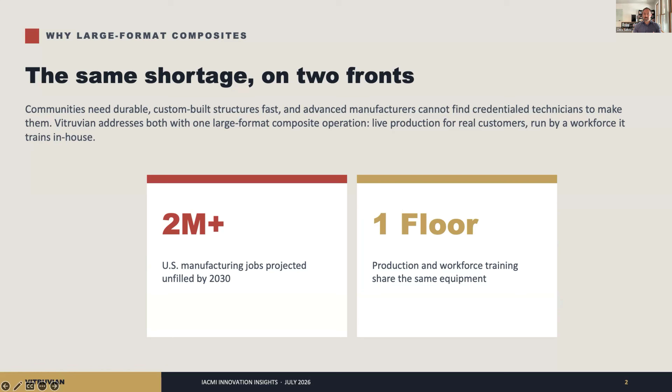Vitruvian exists to solve the housing crisis, and that was the first obstacle we came across: labor is one of the major issues. Technology is an issue, but technology is really there to address labor at the end of the day. We found that we can use technology to attract new types of labor to the labor pool, and do so in a really engaging way.

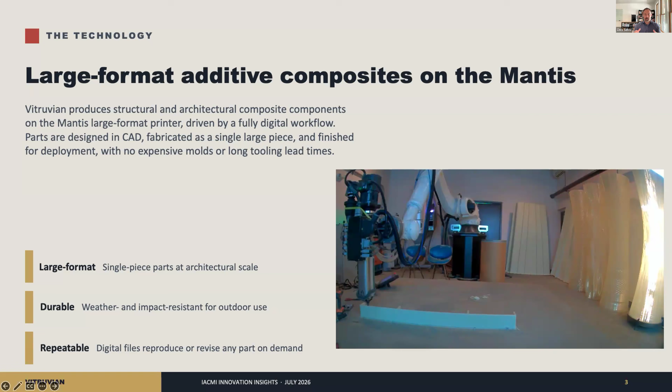Ours starts with technology. Like any tech company, we get excited about our machines. We have two large format printing systems: one composite, one cementitious. Today we're talking composite, so we're talking about the Mantis. This is built on a KUKA robotic system, large format. We can do anything from architectural components down to automotive components, and there's a lot that can be done with these flexible systems. That's what makes them exciting—we can set them up to run for weeks creating one thing, or every few hours change what that output looks like.

And it's built for the real world. We're putting out things that are not bleeding edge—these are materials and products being used today. You're going to see examples in this presentation. Everything from large format where we're doing 100+ foot installations to custom, smaller parts. But with a system like this, automotive is probably about the smallest, and maybe furniture is about the smallest thing that we're printing.

So if I ran into you in Denver, I was probably showing you pictures and video from this. This was our latest large installation. We did this for something called the Forbidden Kingdom Festival. This was 3 weeks of printing—it was quite a sprint to put in an 86-foot tall Gothic castle that rose above the main stage. If you're on the ground, this thing's 100 feet above you. And you can see in these pictures just what we did.

We're printing the columns and the parts of this. They were then painted on site, had to go through extensive testing. And the pictures at the bottom are professional photography—that's not AI. That's actually this thing being used, flames being shot up the side of it. It was one of the coolest projects we've taken part in, and it performed well—it didn't light on fire, which is great, of course.

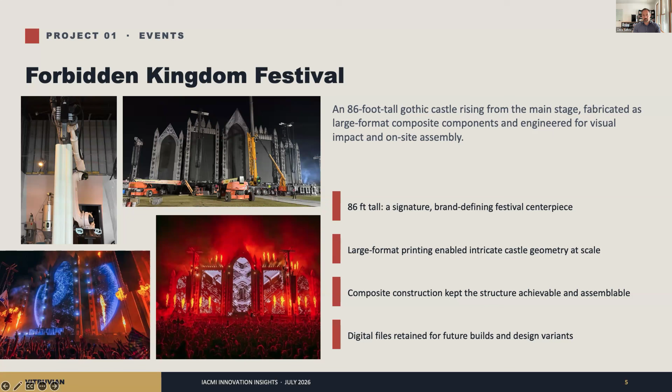It got a lot of lift on social media for this festival. They were able to sell out their 2027 tickets within 4 hours of releasing them based on the experience of this event. So to them, that's quite an economic success.

Much more grounded, we've built signage using molds, and you can build signage very traditionally as well. But one of the unique things we found with our composite systems is you can do some really amazing work and then infill it. So we like to work across different aggregates, different molds, using cementitious aggregate. This was actually coal-based, which we'll talk about a little bit. You're able to make something that's really durable and still get all the flexibility of 3D printing.

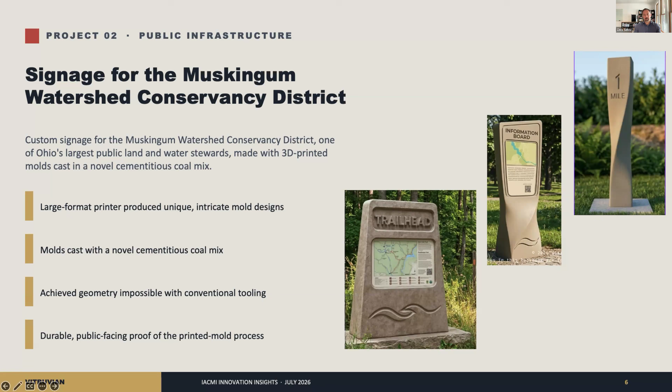So we made these beautiful molds where they feel like they're flowing with the land for this partner of ours across their large campus. They have about 18 counties in Ohio that they serve, so this is a very large trail system, a very large purview for their business. And when we got into that, we actually started dealing with coal—both for our printed aggregate as well as that infill.

Coal is an example, but one of the things I urge us as composites as an industry is to really push what we can do with aggregate. There's some really interesting areas in the aggregate life cycles and understanding what can be used that can have impacts. And regardless of what the situation is and where the incentives are to use different aggregates, I think it's up to us as an industry to really push the envelope, and it makes us more relevant—the more things we can use while building, and the different uses.

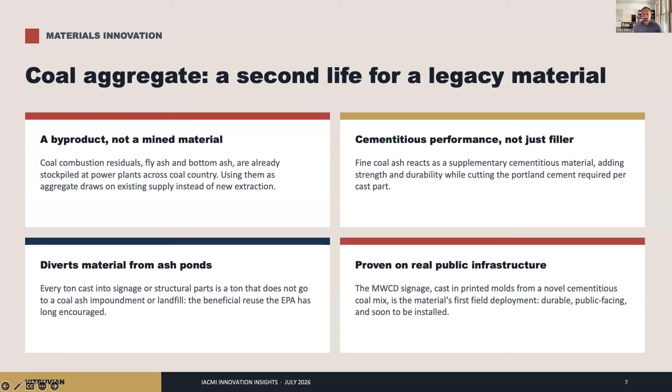We find that coal can actually add—it's not just a filler. It can enhance the strength, it can lighten our products, it can give it a new and unique aesthetic. So beyond just using coal for coal's sake, or trying to get something out of the waste stream, there are really positive upsides to using coal aggregate specifically. I think we can find those in a lot of different industrial aggregates out there that might be being overlooked, so we get really excited about that.

Now, I think at the core of our message and what we do is workforce engagement. Like I said at the beginning, we're running into an issue with this country—we're onshoring a lot of manufacturing. We want to be more active in the built environment, whether building houses, commercial structures, or just manufacturing items in the United States for a lot of reasons. But to be competitive, we have to be. And we're finding that there's a gap because the modern workforce has not really been set up to take these jobs, even though they're really strong quality jobs.

So we use these really neat, novel projects that we get access to, and we bring them to communities. And then we actually train both K through 12 and post-secondary folks, so people in the educational pathway already. We do transitional and we do incumbent workforce—folks who have jobs that want to learn new skills and increase their wage rate.

Those areas are all impacted really positively with what we're doing. We essentially use it as a labor attractant, big, neat machines with huge output and overwhelming projects. And we found that with the right type of education on top of that, we can build in industry recognized credentials and stack them in such a way that as you're learning about 3D printing, you're learning things like CAD, you're learning all these robotics and workplace safety and manufacturing that are then very translatable.

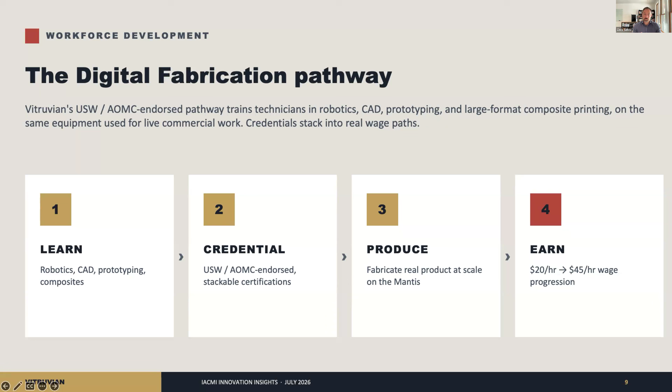And we're starting in manufacturing at $20 an hour, working up to 45 in a couple of years. And that's a really strong wage rate for a 17, 18, 19-year-old all the way through, and they'll continue earning through their lifetime. And manufacturing, as we all know, is a much safer environment than it used to be. This is a worker forward environment, and we can teach and open up new pathways for folks using these really neat projects and technologies that we have built over time.

So lessons that we've learned along the way: outdoor with composites is super interesting. We really encourage testing. Finishing is important, coating and making sure that there's weatherproofing is great. Designing to real world environment is a unique thing to do. We have a great engineering team. I will tell you that when you just put something on paper and when you test it in the real world environment, we all know those are very different things. And when we're talking about festivals with hundreds of thousands of people experiencing something in a short amount of time, or extreme weather events, it's really important to test early and often.

It's also really neat that you can do things beyond just straight building. You can mold, you can cast, and you can do so quickly and prototype very quickly. And the speed with which we can deliver using these materials and technology is wild. To get a job and within 3 weeks deliver tons, literally thousands and tens of thousands of pounds of finished goods with 24/7 printing is, I mean, this is a new thing. This used to take months just to get the parts correctly entered in a manufacturing system to put them out. So when we talk about 3D printing and additive manufacturing, you bring a flexibility that's really been unheard of to this point.

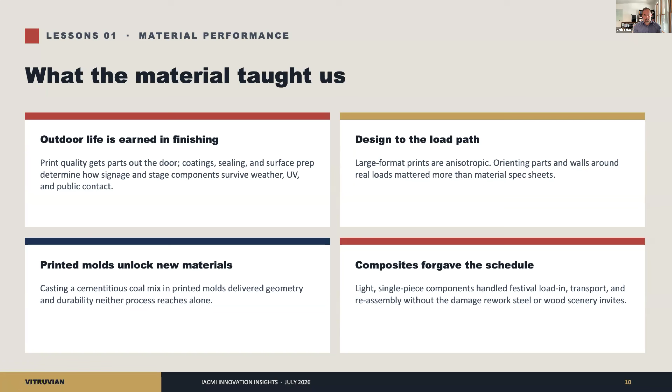And I think the workforce, the economics that drive this, we can do one-off prints and one-off projects, and we're really proud of that. So if you have a unique project that you need that is large format, we want to be speaking with you. We like making things near the install and engaging a local workforce. So wherever we do things, we actually don't want Vitruvian to be the ones delivering it. We want a local engaged workforce to do that.

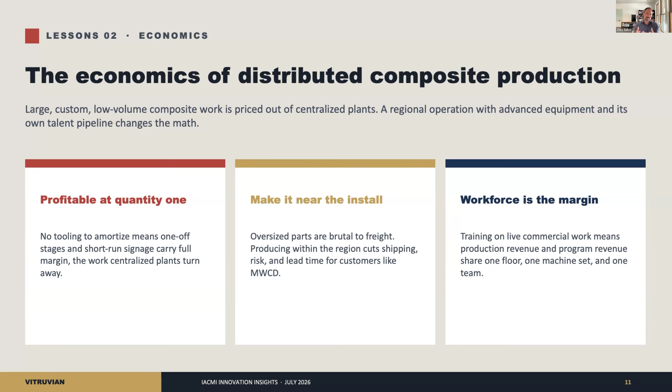And we do that all the way from our factory itself, which is in Athens. And we'll have more factories in other communities by the end of this year, like we have 3 distributed factories. But even when that print's delivered and installed, we want to educate a local workforce on how to do that. So when we work on these trail systems, we're working with a community technical center and actually educating their workforce and the kids there on how to do these installations. So this community can fend for itself. That's at the end of the day what we want to do.

And we're looking for folks that we can work with. So, I'd say that the landing message is let's build together. We're really excited. We're happy to be part of IACMI, and we're looking forward to connecting with folks, whether it's workforce programs and developing accredited learners who can get involved in the modern workforce or doing build projects. We can build it of all sizes.

We're excited. Thank you. Chris, that's really good stuff. Got a couple questions for you. It sounds like you have an incredible placement rate for people that you're training up in these different capabilities. What types of jobs are they landing when they come out and get into the workforce?

We were all over the place. Our first programs were all construction focused. So we sent people to the construction unions, we sent people to contractors, and then things like city jobs and things like that. As we get into manufacturing, we have partnerships with some of these more big mega projects in Ohio. So they're getting into more traditional manufacturing roles.

And outside of that, we've had a lot of folks who continue the STEM pathway. So high school students who now can put on their college applications that they've built a house with a 3D printer or they've done these large format things and going to engineering schools, which we're proud of, like Purdue and the University of Cincinnati and some really great programs.

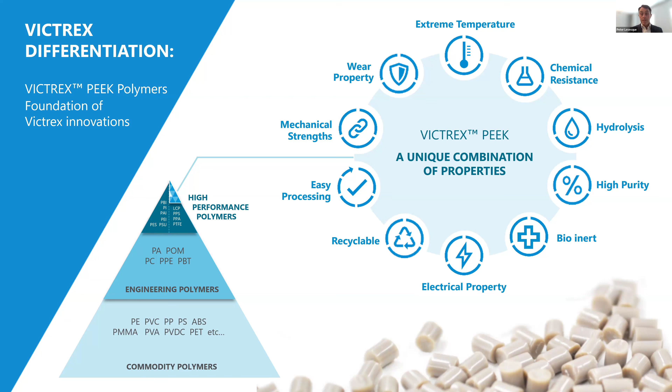As I mentioned at the beginning, Victrex makes the polymer, but we also make many forms of the polymer. After the patent on PEEK ran out, Victrex created a more easily processable polymer called low melt PAEK. Our trade name is AE250, but it's pretty widely known in the composites industry as low melt PAEK. That polymer, that powder, can be turned into a number of different forms.

One being filament, a fiber in and of itself. Another is films, and another is compounding with glass or carbon fibers. Those are all useful for making parts in their own forms or as additives to other parts. But we here at TXV primarily use the UD tape. So you can make a pre-preg tape, or others use it to make a pre-preg woven product. And then we manufacture composite parts out of that UD tape. So continuous carbon fiber with a low melt PAEK matrix.

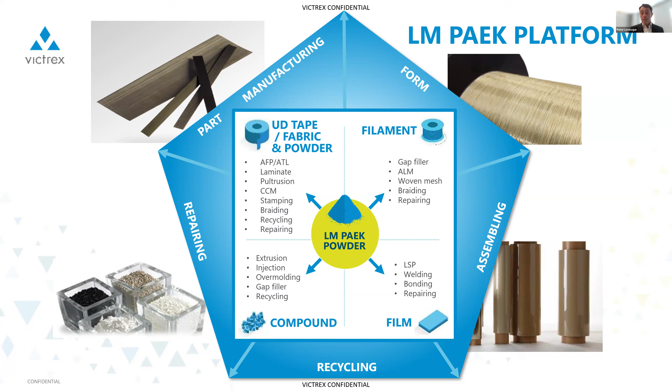All of these materials, when they're deployed in aerospace, require allowables. And as these materials are relatively new and don't have decades of history out in the market, we took it upon ourselves to generate allowables for the UD tape. So we worked with NIAR and created the basis of the pyramid here through all the coupon testing to generate lamina and laminate level allowables.

We've done that for our UD tape with an AS4 fiber from Hexcel, as well as an AS7 fiber from Hexcel. And then Toray has also done this with their T700 fiber UD tape and their T300 5-harness satin woven product. Now these coupons establish the base of the pyramid, the fundamental building block that engineers and designers will use in order to start their design. So it's the library of material properties that they will need in order to begin designing their elements, which turn into details and components and then the system.

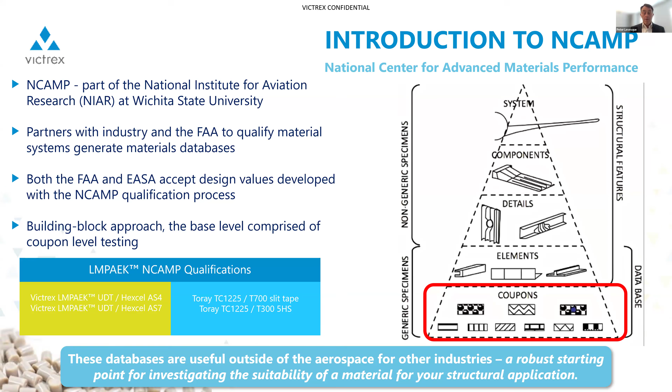We've also done quite a bit of work establishing properties of the injection molding compounds, the films, and the fibers. The polymer itself is very well documented and very well understood, from two angles. One, the performance of it, like you saw with the allowables, but also the manufacturing and processing of it. It's important, we find, to absolutely be able to predict how a part will turn out, either through mold flow and injection molding simulation software, or through stamp forming and draping software. And that covers the flow, the fiber alignment, the crystallization rates, everything that you might want to then overlay onto a finite element analysis and predict performance.

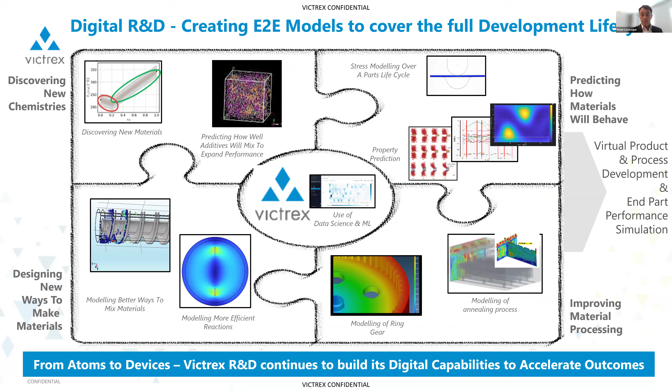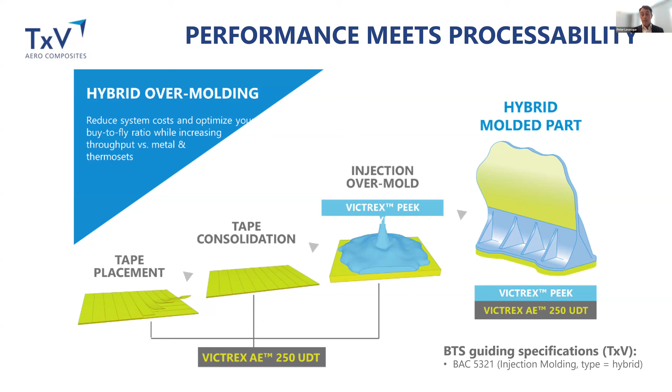So the beauty of combining PEEK and low melt PAEK is its ability to make hybrid parts. We make our composite pieces out of the low melt PAEK, and that melts at a temperature of 304 degrees Celsius. When we combine it with PEEK, we injection mold PEEK onto that laminate surface at 340 degrees C. The 36 degree difference in melt temperature remelts the surface of the laminate, and when they freeze, the two polymers freeze off together and create a welded connection. So you can have this part that has the strength and stiffness of a continuous fiber unidirectional carbon structure, but also the functionality of an injection molded component.

So we here at TXV are solving a problem that Victrex identified in the marketplace. With this low melt PAEK polymer and collection of unidirectional tapes and composites, there were a number of parts that could be manufactured either as straight composite components or as hybrids. But Victrex saw that they were playing matchmaker, finding somebody to do the design work, somebody else to do analysis and modeling, whether structural or manufacturing analysis, then maybe find a tool maker, then somebody who could do the prototyping and testing, and then somebody who could eventually transition to serial production. 9 years ago, Victrex created TXV, and we are all of those things under one roof. So we take parts from concept design early on all the way through to serial production at the end.

So we've developed this process expertise, and we've got the decades of material expertise from Victrex, and we've combined that with a collaborative engineering approach where we're really trying to understand the application and educate the customer a little bit on what the possible solutions could be with this polymer system, so that we can design and build parts that will be manufactured at rate and save money and save weight.

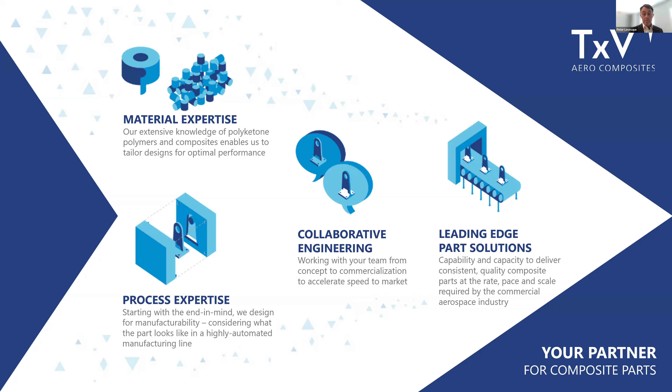So while we bring the materials and the process expertise to the equation, we don't know anything about the application. So we have to really lean on the customer to understand exactly what their part is doing. What problem does it solve? What is its original use and intent? We go through a number of questions to try to peel back the layers of this part and try to figure out exactly why it is the way it is, so that we can rebuild it in a parallel solution using these materials and this process.

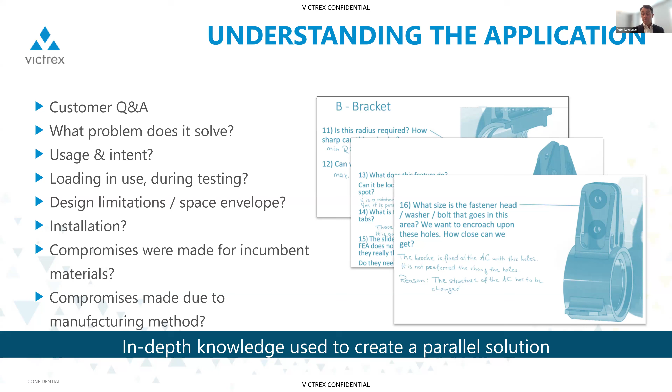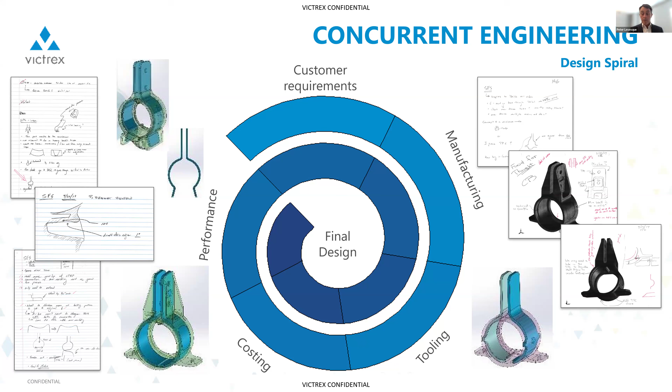It's not always linear. We end up going over certain requirements a couple of times until we get it right, because our initial understanding of the part is on the surface only, and we'll try to come up with a solution that can be made, something that we could potentially wrap a tool around, try to see if it hits the cost and performance targets, and then inevitably, when we present that to the customer, we'll get some additional feedback, and then we'll have to home in through a couple of iterations of this path down to the final design, where we're all confident that we can cut a tool and cut some steel and then eventually make some parts.

What happens though along the way is there's a number of these design enablers that exist because of the polymer and the material combinations. When we're combining the two polymers, they're close cousins to each other, so the weld connection is very good. We're combining short fibers with continuous fibers. We're combining stamp forming with injection molding, and we're potentially welding parts together as well. So there's quite a bit of opportunity to come up with the ideal part and save weight and really have a very elegant thermoplastic composite solution. But it takes a little while, and there's a whole tool set that we use to de-risk the question of cutting tools around those.

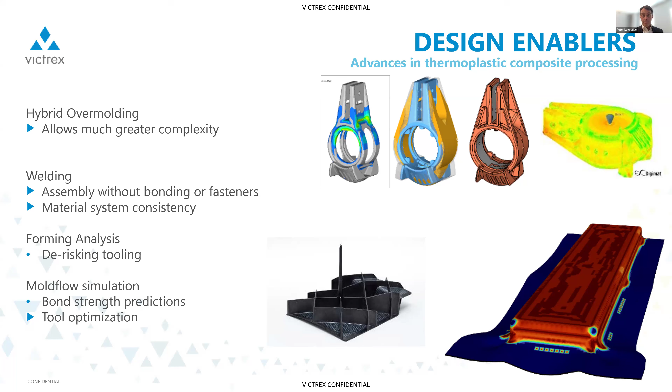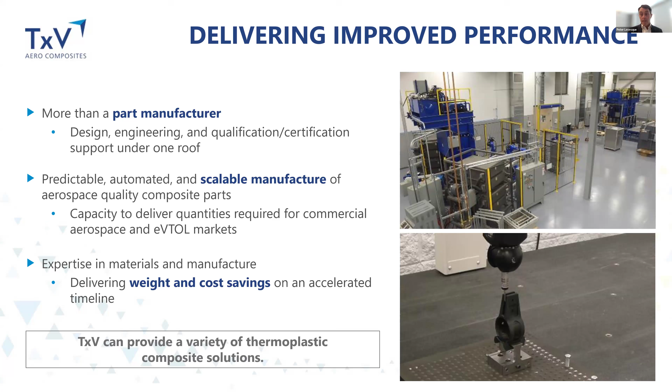Our manufacturing environment here, we're located in Bristol, Rhode Island, and we have a highly automated manufacturing environment. We have just as many engineers as we do operators, and our engineers are working with the robots and the automated systems and building out the factory so that each of these cells is really single operator run, and we can build parts at high rate. It's very scalable. Each part we're measuring the touch time in minutes or seconds, and in many cases we're building multiple parts per cycle. So it's a very efficient manufacturing process, really enabled by these high performance polymers.

We have a bit of a screening process that we like to use to figure out what's the right part. Certainly complex parts and parts that allow themselves to be combined and reduce part count is good. Part complexity is typically not something that goes along with composites, but when you add in the ability to injection mold features, you can really make some beautiful and otherwise impossible composite parts using injection molding to add those features. We also like to look at the buy to fly ratio of the existing part. Many times we're looking at a hogged out aluminum or titanium chunk of metal, and those tend to spend a lot of time in the machine creating chips. So they might buy 10 times the amount of material compared to what actually flies, whereas we'll maybe buy 1.2 times the amount of material that actually flies.

I mentioned part consolidation. When you're functionalizing a composite with injection overmolding, you have a golden opportunity to reduce part count. And then certainly mechanical performance. These are high performance materials and high performing parts. So if it's decorative or not being asked to do a difficult job, then it's probably not a good fit. And like anybody else, we like high unit volume, but we found that if you tick enough of the boxes early on, the unit volume problem actually isn't that bad. We've seen parts that make sense at single piece per ship set.

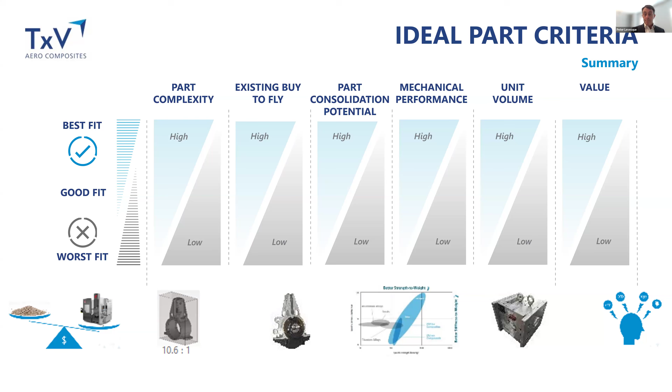A couple of examples of parts. Many of these are simply stamp formed, but these are either stamp formed shells, much like metallic stamp forming, or in a few cases we've got some hybrids. And the hybrids, we like to think of them as one of two types of parts. Either it's a shell that needs local functionalizing, local features that you want to injection mold, or it's primarily an injection molded part that requires local composite reinforcement. So think of it as the composite could be the bones inside the overmolded flesh and muscle.

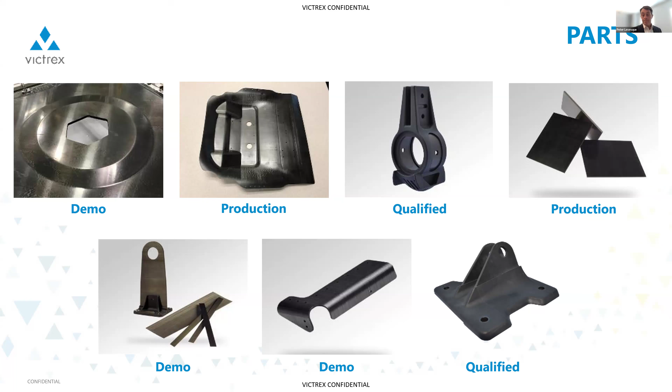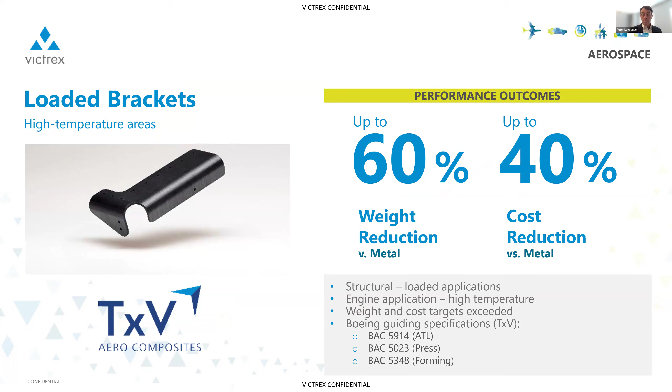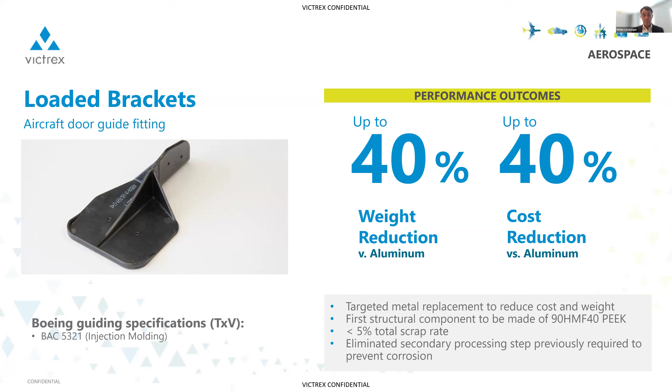Like I said, these are high performing materials, so you can reduce a lot of weight and accomplish the same job. And because they're thermoplastic based, they really lend themselves to high rate manufacturing. So you can take a lot of cost out of these parts. Again, reducing weight, reducing cost. We understand that in many cases we have to sort of buy our way onto the airplane or onto the application, and these parts typically have no problem doing that.

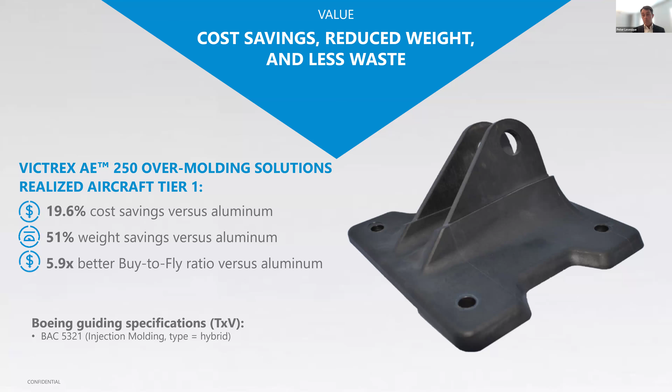More cost and weight savings. This mentions the buy to fly ratio. So in this particular part, the incumbent piece was basically buying 6 times the amount of material compared to what actually made it onto the plane. So you can see that that $3 or $4 per pound piece of aluminum now is quite a bit more expensive before you've even put it in the machine.

So with that, we can open it up to questions. Peter, I got a couple questions for you. The first one is, has PEEK been used or is it being used in high temperature environments such as ablative composites for aerospace? Ablative, I'm not so sure about. It's I guess intentionally quite high. I don't know of any myself, but I can look into it. Certainly, there's definitely people at Victrex with more history than I do, and they would know.

Question. How are the LMPAEK prepregs manufactured? In other words, are you filming them and then prepregging, or are you doing a powder fluidized bath, etc.? I would say all of the above. It just depends on the manufacturer. We have our method, which is, I think, a pretty traditional method. And I know Toray has their method, and Teijin and Barrday and Ensinger, they all do it their own way. But it can be done in basically any of those.

Great. All right, well, in the interest of time, we're going to move on, but thank you for the presentation. And let's go ahead and switch it over to Gene. Gene, if you wouldn't mind trying to share your screen and jump into your presentation. And you'll need to unmute too, Gene, so we can hear you. All right. Very good. I think I'm on. You're on. You just need to throw it into presentation mode. Okay. There. Perfect. Looks good. Very good.

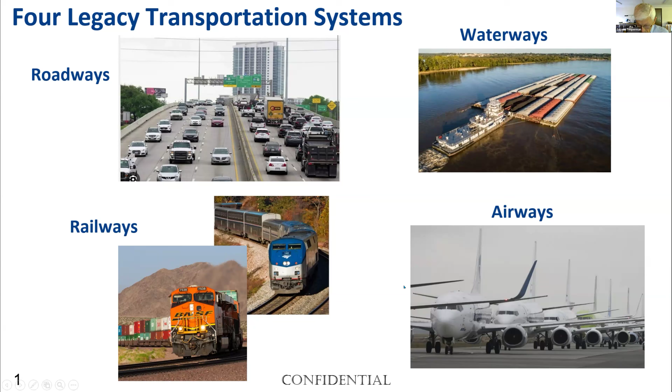We're going to talk today about transportation. And we have 4 modes of transportation: roadways, waterways, railways, and airways. In recent years, of course, demand has been increasing, and trying to keep up with those increases in demand has been very, very expensive for our country. And so adding more lanes to a highway, the congestion doesn't go away, and the improvement is marginal.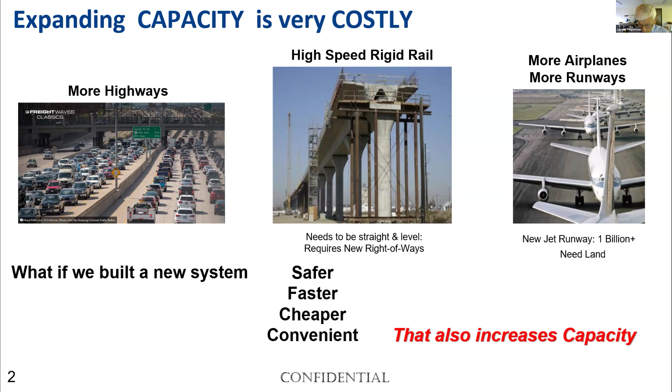High-speed rail, trying to add another rail system to the country. Well, we all know where that's going. Adding a new airport, a new jet runway costs $1 billion up, and it goes up from there. They all need a lot of land, which is not readily available. So I challenge people to say, what if we built a new system that would be safer, faster, cheaper, and convenient? And a new system, an entirely new system, would dramatically increase capacity.

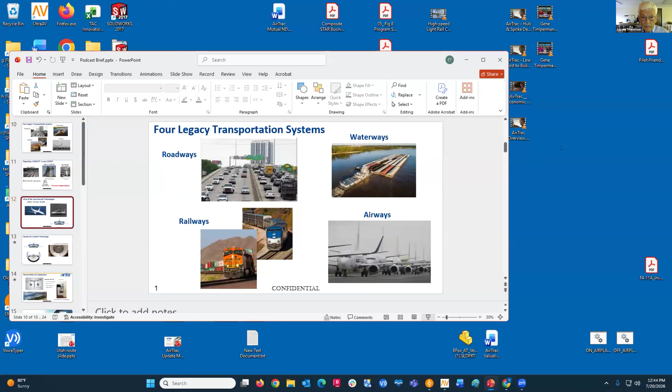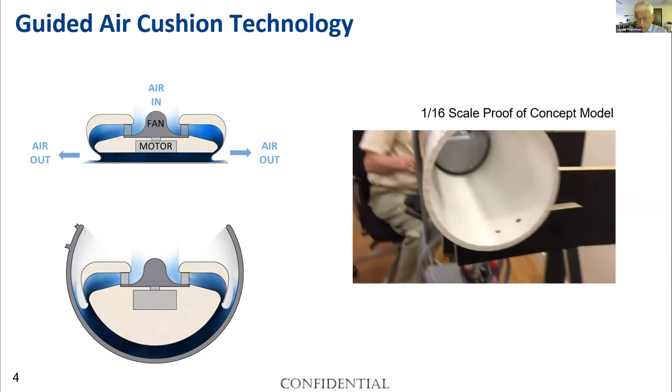Now, having a concentrically designed air cushion machine in a trough, which we now call a guideway, putting a roof over the top of it for all-weather operation, hang a vehicle underneath of it, and support that guideway on cross members and towers, we now have the elements required for a mass transit system. It is modular. You start with foundations in the ground, towers, cross members, and guideway pieces between the towers. It can be put up in pieces. It can also be taken down in pieces. A radical new idea for ground mass transit.

Also integral with the AirTrac concept is a high-speed switch, a switch rail mounted on a balance beam system that's motivated up and down by shifting weights back and forth. It works like this: the vehicle comes along, descends one guideway diameter, and departs that switch area on the original route. The switch rail comes down, and another vehicle can pass over it and depart on the alternate route, all at speed, 70, 80, 90 miles an hour.

Now, this configuration of air cushion machine, concentrically designed, hanging a vehicle below it, forms a natural pendulum. That brings AirTrac a tremendous advantage in being able to make a coordinated turn, no matter what speed it's doing or what radius of curvature it has to negotiate.

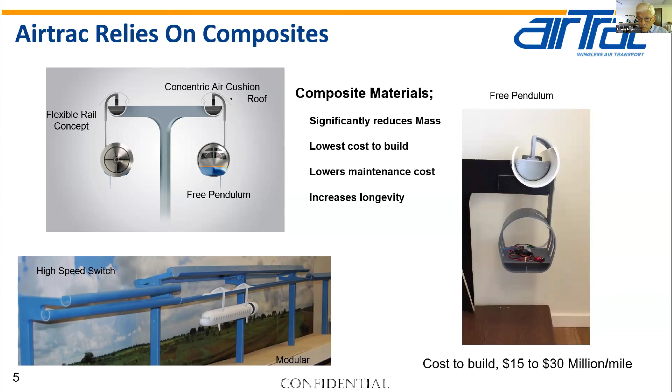So in the whole system, we have guideways, vehicles, hangers, towers, and cross members, all made out of composite materials. And of course, this is not the start of a new business. This is the start of a new industry, and it's going to have a tremendous impact on the composites industry.

Dennis Muilenburg is our board chair. He is the former president and CEO of the Boeing Company. Greg Martin is the former vice president of engineering and technology for the Phantom Works. He spent his career there. He was Boeing's lead engineer on the design, launch, and assembly of the International Space Station, and that just starts his resume. When we briefed him, he said, while I was at the Phantom Works, we took pencil drawings of combat aircraft to flying prototypes in less than a year, and AirTrac is nowhere near that complicated. He said, give me $2 billion in 36 months and I'll commercialize AirTrac with destructive testing and government certification.

Now, Zoltek Corporation has been supporting us for some 5 years or so, and of course we all know it's the US's largest manufacturer of carbon fiber. They brought us A&S Technology, an engineering company, and they did an analysis of the system, the guideway system particularly, and verified my calculations for strength and cost. They also added that 1 mile of the AirTrac system would use more composites than the wind industry has used in a year's time.

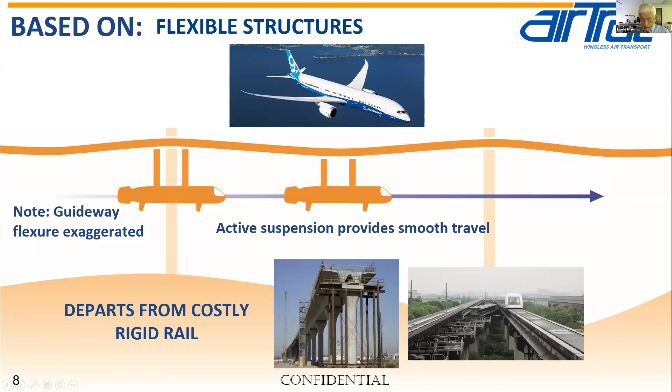This flexible structure concept for ground mass transit is a radical departure from our historic rigid rail systems, high-speed rail particularly, and also maglev rail elsewhere in the world, which use massive infrastructures. It's also based on using existing rights-of-way, simply because it's a pendulum-hung system limited to 200 miles an hour maximum speed, so it can negotiate serpentine corridors.

AirTrac is an additive technology, demonstrated by the fact that if we were able to use railway rights-of-way, we would add regular and very frequent passenger traffic and partial freight traffic income to their bottom lines.

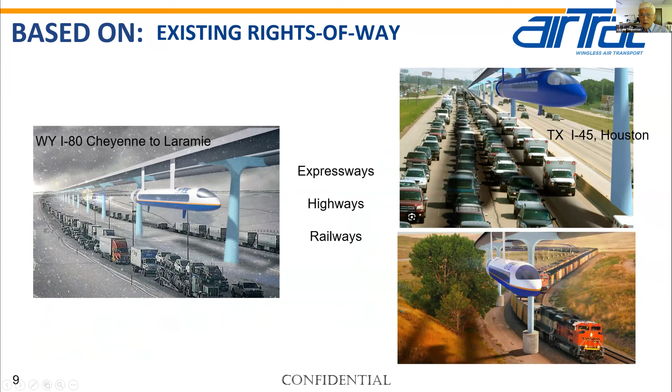So far I've said AirTrac is elevated on towers. We could also elevate them on arches, which permits us to move through dense metropolitan areas such as 42nd Street in Manhattan. Suspension bridge technology also gives us the opportunity to step across difficult infrastructures in our city cores. And even though Cincinnati is not a huge city, it does have a dense core.

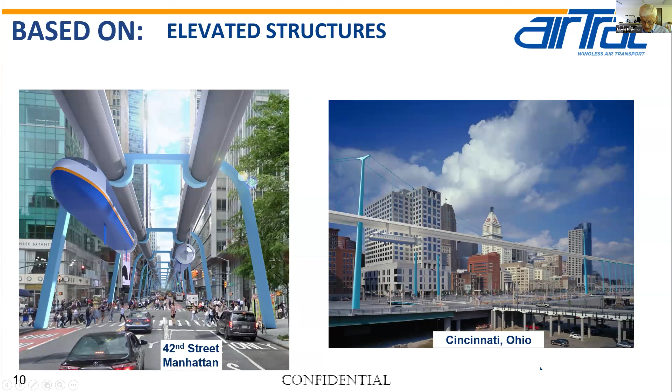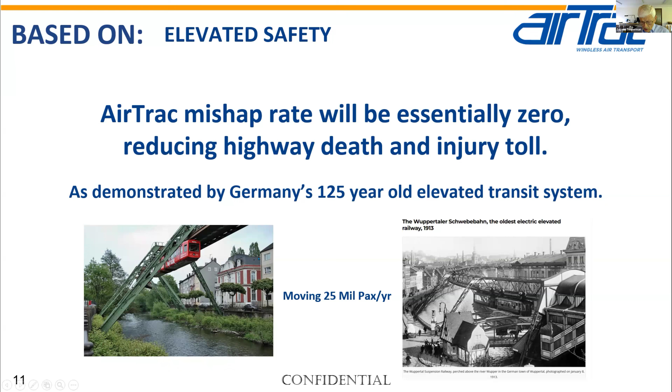Elevated transportation throughout the world has demonstrated itself as being the most safe form of transit there is. This is demonstrated by Germany's 125-year-old Wuppertal system, which started operation in 1901. It's moving today even 25 million passengers a year. It's had one fatal accident caused by a maintenance error, which should have never happened. So AirTrac will be very safe, and it's also an independent system. We don't interfere with anybody, and nobody interferes with us.

The value of AirTrac is dramatically demonstrated by looking at California high-speed rail from Merced to Bakersfield, for 165 miles thereabouts. They're saying it would cost $26 billion to complete it, and that's even up for question. That would make it $156 million a mile. AirTrac has been costed out at $15 to $30 million a mile, and that's using all the basic construction history of aviation, materials costs and weights.

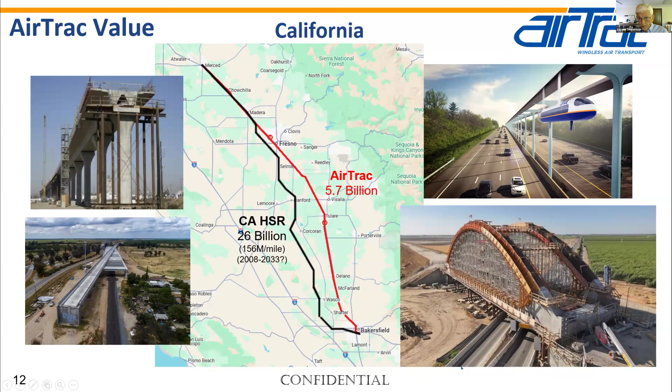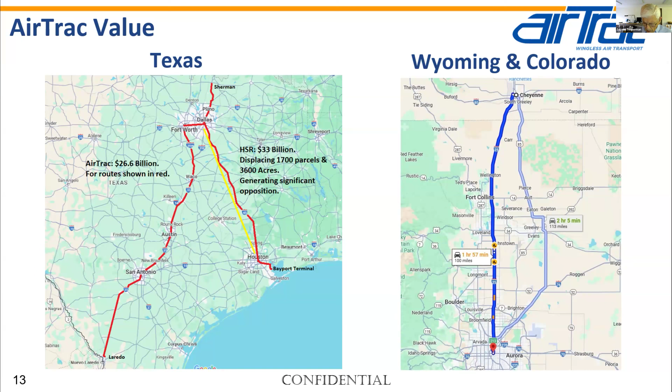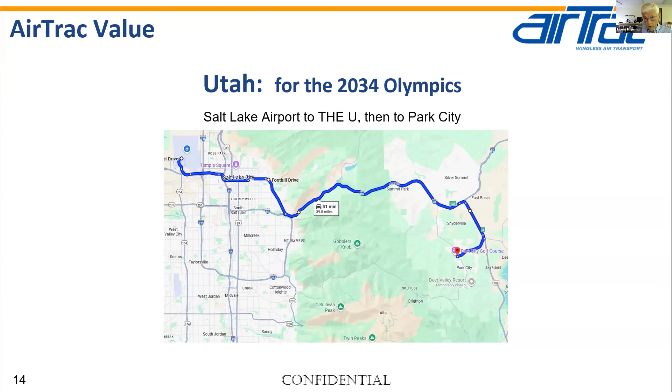Utah is facing the 2034 Olympics, and their light rail does not go up mountains. So they're getting interested in AirTrac from the airport to Park City, right past the university. That provides consistent, rapid, and frequent transportation for these upcoming venues.

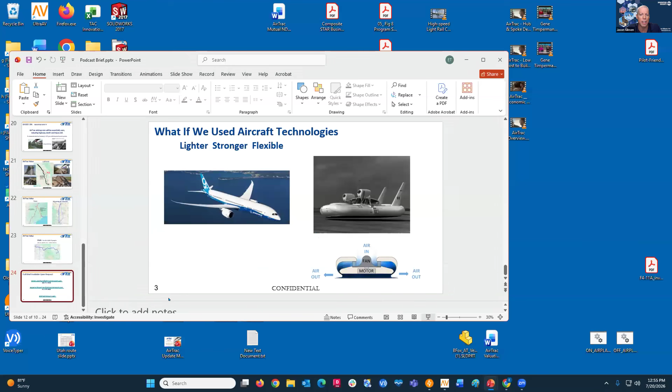Thanks, Gene, I really appreciate that. The question I have for you is more general in nature. It seems like you've got a very innovative concept here, and it certainly solves a lot of the infrastructure investment requirements for things like high-speed rail and other options out there. There's a clear advantage in the numbers you've presented, but if you wanted to communicate one thing to our audience, what is it that you think you need to help get your message out and get more groundswell support for this type of mass transit that you've patented and developed here?

Mitch, would you like to answer? Sure. Jason, for the very reason that we wanted to participate in your gracious offer on this podcast, we need partners. We need composites companies that will ask for a brief from Gene, get a full brief. We're very transparent. We talk about all the attributes of the company, what it can do for this country. And the fact is, it will drive demand.

That is why Zoltek wanted to partner with us, that's why they're promoting it. You've seen the potential for it. So has ACMA. We need partners, more partners, composites companies that see the value to advocate with their officials, not for money, just for dialogue. We need to promote the dialogue in this country about alternatives to these high-cost foreign competitors. All the competitors on high-speed rail, those are foreign companies. Gene's an American. This would be American designed, American built, for Americans. That was his reason. So we need partners.

So we're hoping all the listeners here will ask for a brief. And when you look at this system, just try and imagine, you can't. There are going to be a lot of parts, composites companies involved in making this a reality, and we need as many partners as possible. So thanks for that question, Jason. Yeah, no problem, well, appreciate your time.